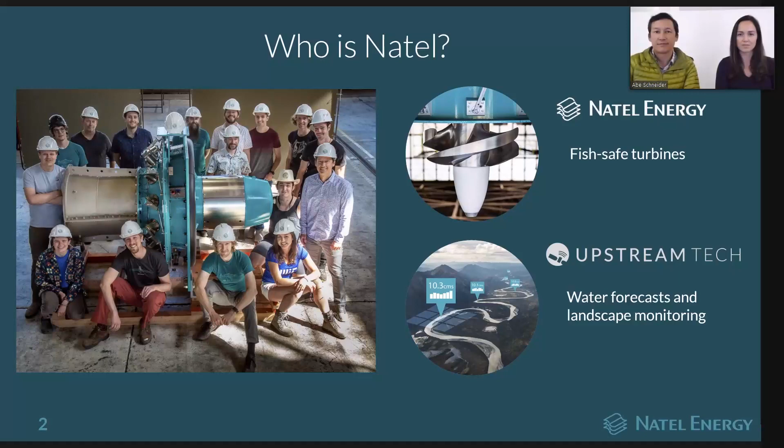One of the forks ran through an area of the watershed that was managed for multiple uses, including cattle grazing. Some of the ranchers would take out the beaver dams in that fork, thinking that the beaver dams flooded the meadows, but actually the beaver dams were essential in the creation of those meadows.

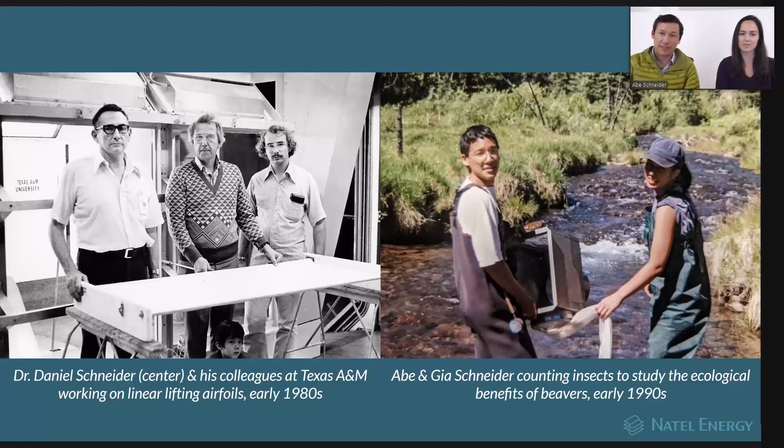Turns out there was a significant difference, an increase in the number of beneficial macroinvertebrates in the stream that had healthy beaver activity. So this motivates our work today.

It's because of the effects that their small and porous dams have on the surrounding riparian zone, increasing the quantity of water in the soil and keeping all those plants healthy and green. So beavers are one inspiration for showing us how we can do infrastructure better. And that's really important when we look at some of the issues with migratory species and hydropower.

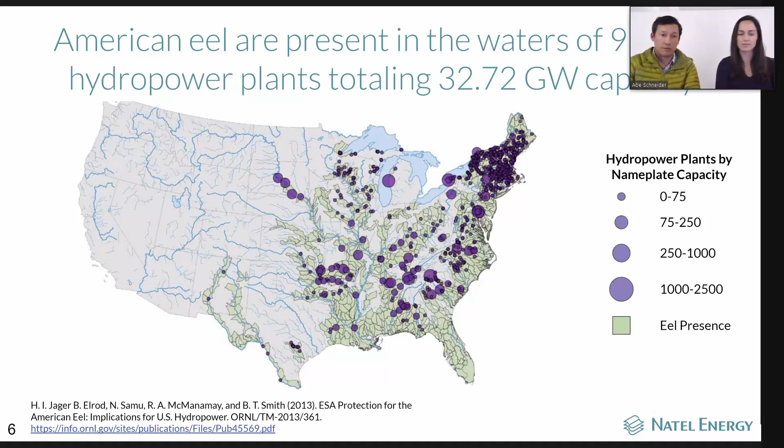To go out to the Sargasso Sea to complete their life cycle. That's an inherent issue, because they need to pass through potentially numerous hydropower facilities on their way to the ocean.

A lot of intense focus is now being placed on the effect that hydropower facilities have on the ecosystem, including fish passage. There are hundreds of hydropower facilities undergoing relicensing in the next decade, and 70% of those projects are on eel territory. Many of those projects are relatively small, leading to a pretty severe issue with eel passage.

The other important aspect about the US fleet, and this is also true of the Canadian and European hydropower fleets, is that the average age of these facilities is quite old—over 50 years. Many of these facilities already need to invest in refurbishing and modernizing their turbines simply to keep them operating. This presents a real opportunity to make a wise decision to both modernize and relicense these plants with an eye towards improving safe fish passage.

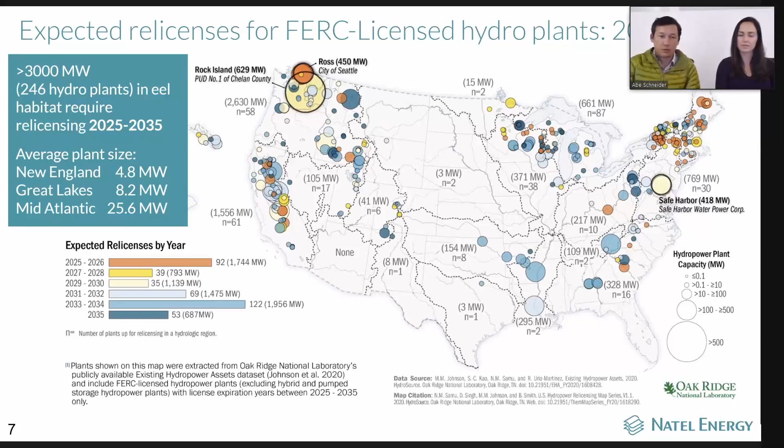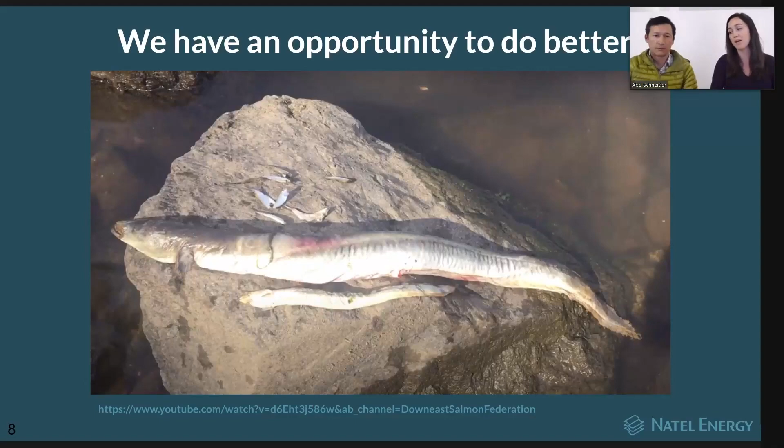Just like Abe was saying, at this point in time we actually have a major opportunity to improve the way fish pass downstream through hydropower plants. Out in California, we have some different migratory species than what is over on the East Coast, but we are still very familiar with the St. Lawrence River and specifically how important a watershed that is for the American eel.

This is the current situation when hydropower turbines are not safe for fish. When the turbines are not safe, really the only options are to either screen the turbines and give fish alternative pathways around the plant, or to require turbine shutdowns, particularly during migration periods. In some cases this can work, but it's a very difficult solution because it's a trade-off of what flows can be used for hydropower generation versus fish passage.

When you have a situation like this, a situation of fish exclusion, the fish need to find a very likely small fraction of the flow to be able to complete their downstream migration. Besides that, you have risks of fish still managing to pass through screens or get injured on screens and incur mortality through that infrastructure as well. This needs to be done on potentially numerous power plants in series, all the way from the headwater down to the ocean.

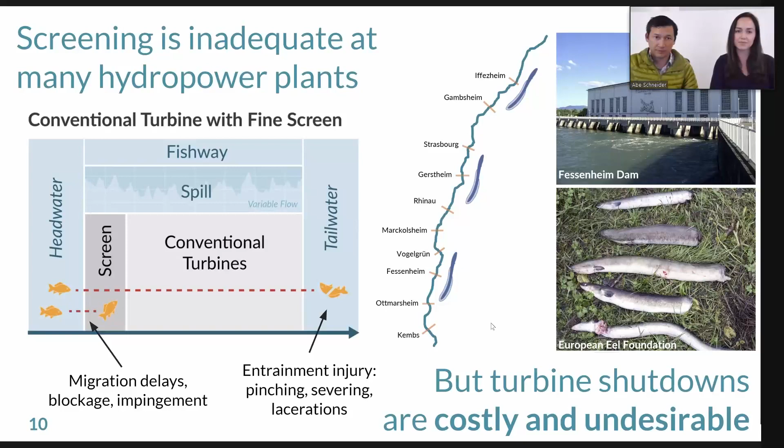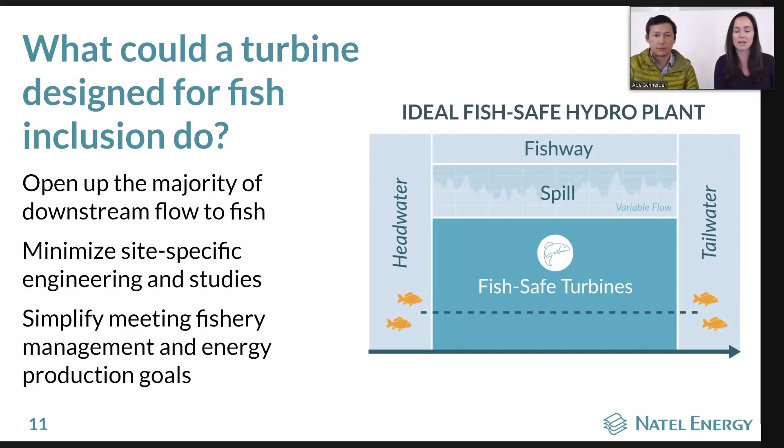So just to take a step back, we've mentioned this term fish-safe hydropower, and this is something we want to make sure is really well defined. Truly fish-safe from our perspective means having a negligible effect on fish populations in a watershed context, and that may vary for different species, life stages, and rivers. For example, if you have a river with 10 hydropower plants in series and fish need to pass from headwater to tailwater, a 99.5% survival rate per site gives you a 95% survival rate for the population. So true fish safety can be a very high bar.

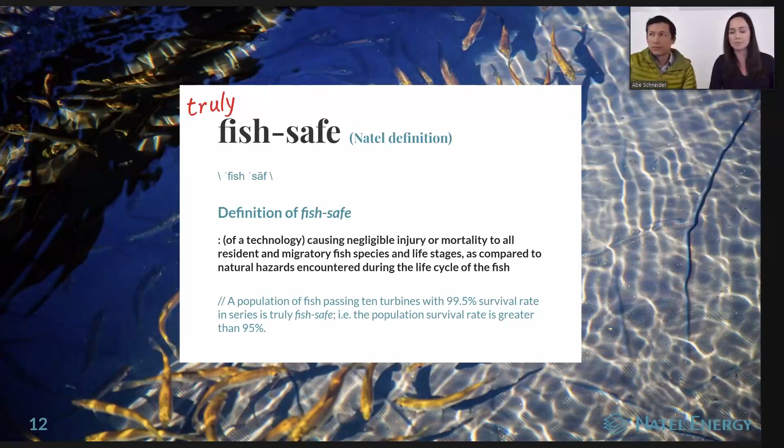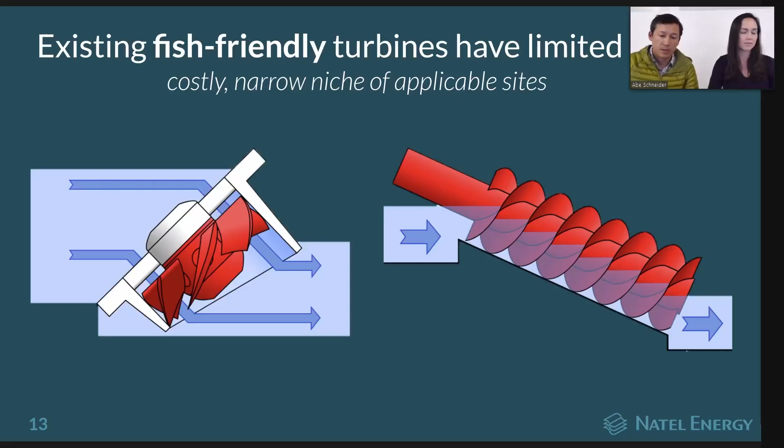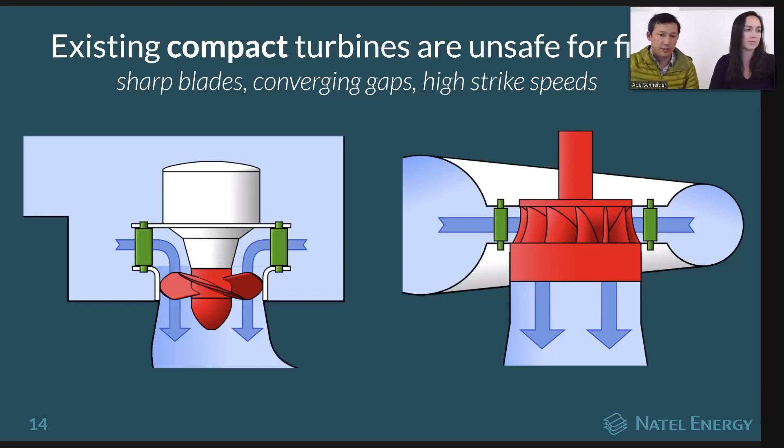So instead, what's needed is a way to rethink how turbines like these function in regards to fish safety. On the left is a propeller or Kaplan turbine, and on the right is a Francis turbine—the types of turbines that generate the majority of energy today from hydropower. The turbine on the left is found very commonly in Canada and the US at projects with less than 100 feet of head. In those turbines, the mechanism that kills fish is often mechanical rather than pressure related, because the blades are thin, move very fast, and in some cases have converging points where a fish can get stuck and pinched between a moving part and a stationary part.

So the question is, is it possible to improve strike survival by design? And the bottom line is yes. We're building on work that was done about 10 years ago by Alden Research Lab.

In this slide are a set of photographs taken from 1,000 frame per second high-speed videos of fish being struck by both thin blades and thick blades. What Alden discovered is that there's a very key ratio—the ratio of the length of the fish body to the thickness of the blade striking it. If that ratio is small, or close to 1, the fish can survive significantly higher strike speeds than if the blade is much thinner than the fish. As Natel started to think about turbine design for fish safety, we really looked at these stills.

It's really interesting to see some of the fluid mechanics going on. In the upper set of images, the fish is struck by the approaching blade, but its body shows no indication of the blade approaching until it's actually physically contacted. The fish is then sharply bent around the blade and is very likely to die from spinal fracture. But when a fish is struck by a thick blade, its shape actually conforms to the geometry of the incoming blade even though there's no contact at all. This shows that work is being done on the fish body by the fluid being pushed by the blade towards the fish. So there's no sudden change in curvature, and the fish is able to slide off and live. This results in a 50% increase in the safe strike speed of the blade.

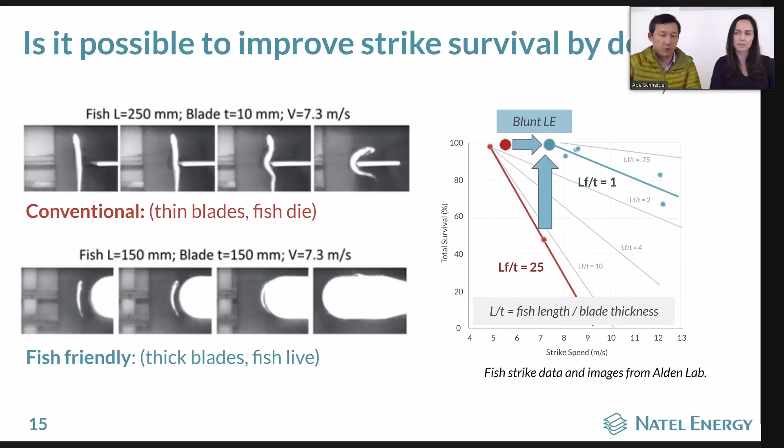But this isn't in itself sufficient to design a turbine that's as competitive as conventional turbines in terms of energy density. We'll get into that in a second.

As our goal was to figure out how to design a turbine that could operate at higher speeds while still being safe for fish, we conducted a series of fundamental strike studies at Alden Laboratory using their linear strike facility. What you're looking at here, this big long blue tank, is a rectangular flume with a set of rails that allows you to propel different representative turbine blade geometries across the flume, and different sizes of fish can be placed within the viewing chamber.

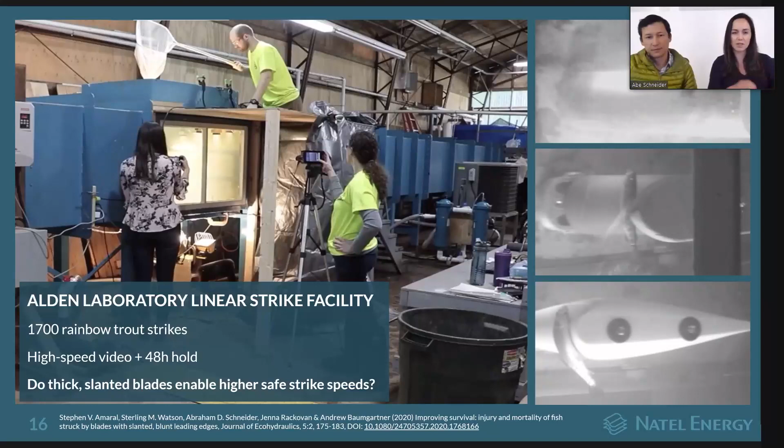So you can collect high-speed video of the strike event, as well as detailed injury and mortality observations afterwards. We conducted a study here in 2019, and the results were published in 2020. We looked at how the size of the fish relative to the thickness of the blade, the L/T ratio, the strike velocity, and the geometry of the blade affected strike survival outcome. That's been a very important data set as we've continued to develop our turbine designs.

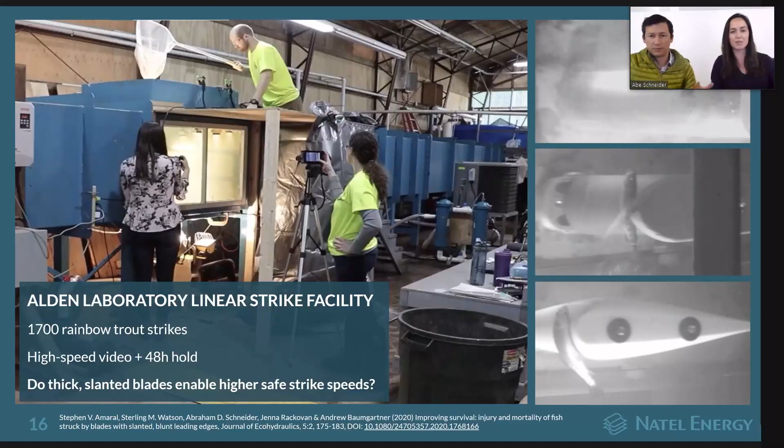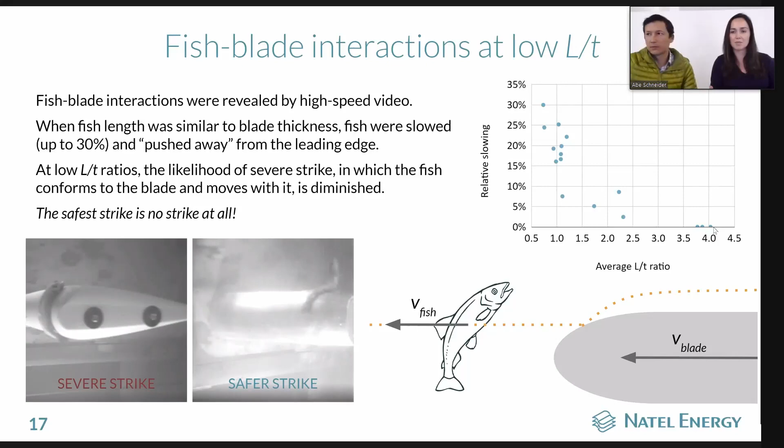One thing we learned from the analysis of the high-speed video from the strike study was a bit of quantification around why these very thick blades improve strike survival outcomes. As the L/T ratio gets smaller, or the blade gets larger relative to the size of the fish, that blade actually acts to push the fish out of the way. At L/T ratios around 1, the fish can be slowed by close to 30%, and so the actual contact, if it occurs, is at a lower velocity. That helps explain why these types of blades can really improve the strike survival outcomes.

I mentioned that making blades blunt isn't enough to allow for a turbine to be as power dense or energy dense as a conventional non-fish-safe turbine is. In order to do that, we needed to allow for a significant further increase in rotating speed of the turbine, which could create problems because then the tip speeds get really fast.

Our approach to allow for a turbine to rotate at maximum possible velocity while still respecting the biological limits of fish is to add a slant to the leading edge, which gives the turbine a very unique shape. In these images on the right, you can see the leading edge of the blade is swept forward out towards the tip. Out at the tip, where the tangential velocities are highest, this slant allows for a reduction in the normal component of the strike velocity that the fish feel. This allows for effectively achieving a uniform strike force all along the leading edge of the blade.

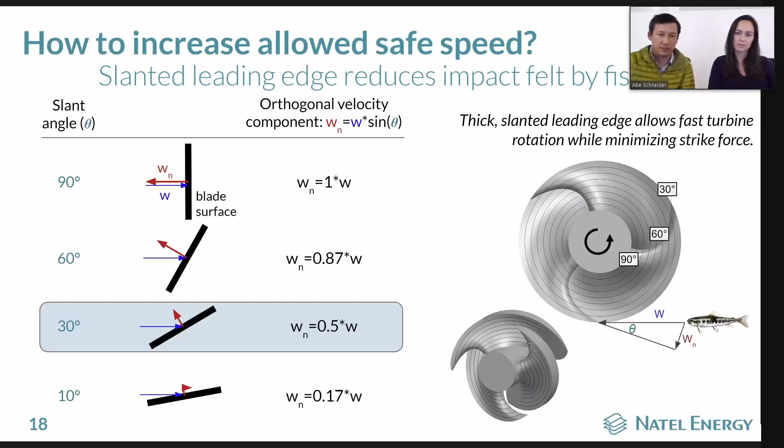That's the hypothesis we tested in the linear strike rigs at Alden Research Laboratory. This gives you a sense of how a turbine designed with these principles might appear in comparison to a conventionally designed simple propeller blade. As you can see, the blade on the left has very thick blades that are noticeably swept forward. There are fewer blades, so there's less blades to contact than a conventionally designed propeller blade on the right.

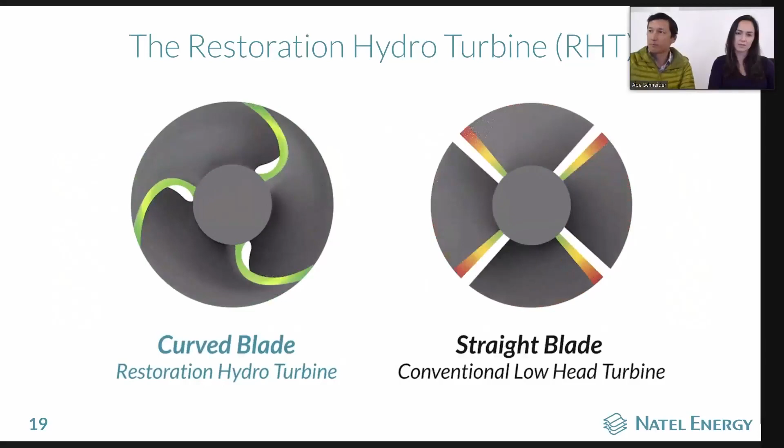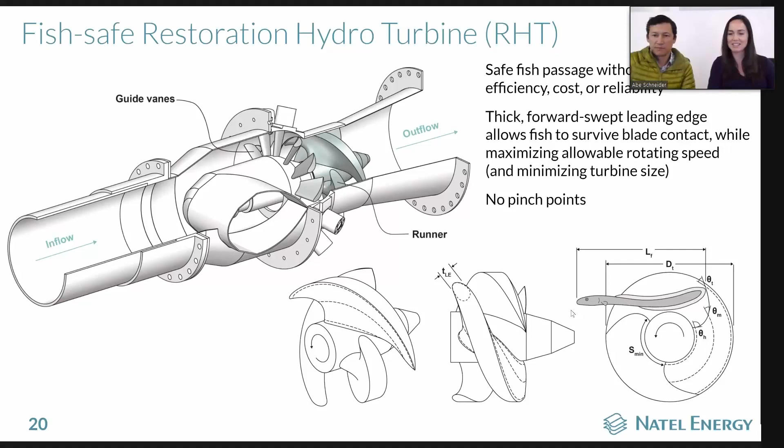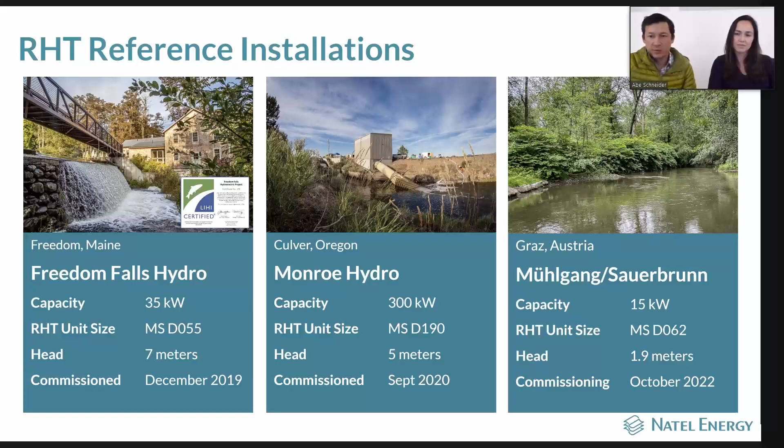At this time, we have three projects operating with RHT style turbines. One is in Maine, at an old mill that's been repowered with a fish-safe turbine. Another is a project in Oregon. And excitingly, the most recent project is in Austria, our first European project. That project uses a submersible turbine. We'll take a closer look at a couple of these projects.

This slide shows some photographs of the Oregon project. This is the largest turbine we've built to date, but not the largest we're in the process of designing. This is a 1.9 meter diameter runner, operating at a 5 meter head, producing 300 kilowatts. It uses a direct drive machine, very efficient, very simple in its operation.

This site has had two different fish passage tests, which we'll go into in more detail, achieving safe passage of a wide range of rainbow trout. In this video, you can see one of those trout passing through the moving turbine with yellow balloon tags, used for its recovery. Natel is also in the process of building four additional units of this size at their full rated head. At 10 meters, these units produce 1.25 megawatts apiece.

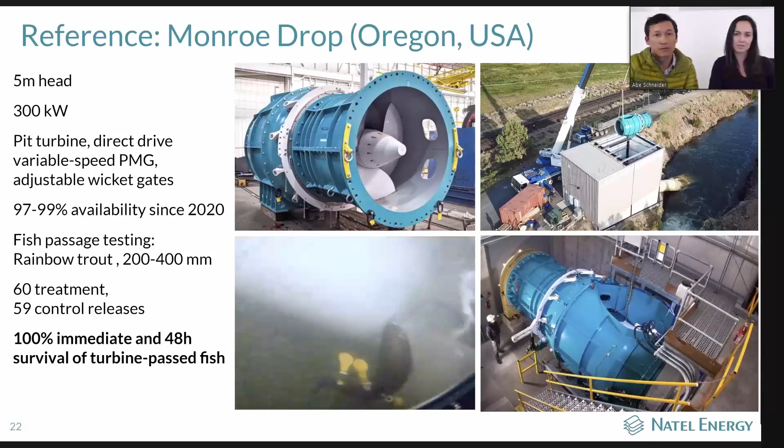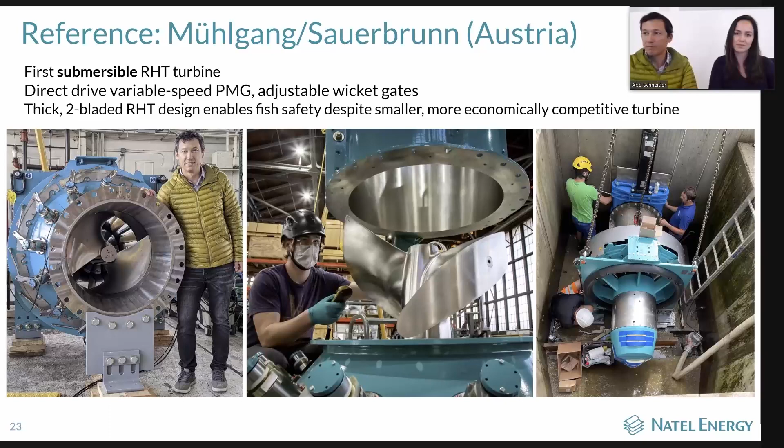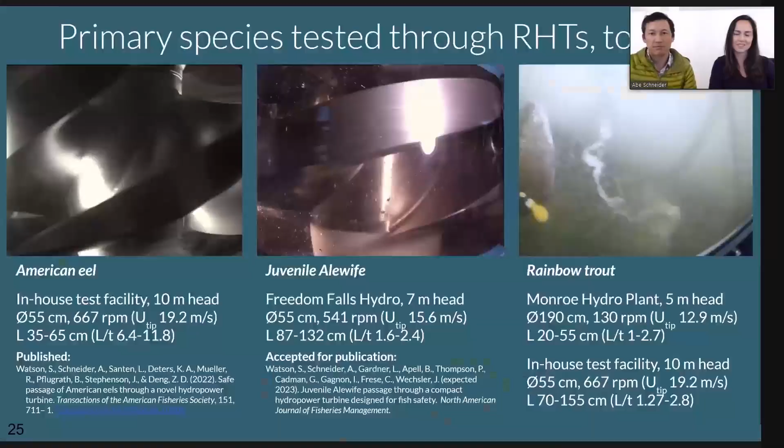Next we'll share more about our fish passage testing, both at small and large scale in lab and field environments. This is a quick snapshot of fish passing through some of the turbines that we've tested. We've tested several different species, but are in the process of getting publications out to describe that work. I'll be talking more about the tests we've done with American eel and also with juvenile alewife.

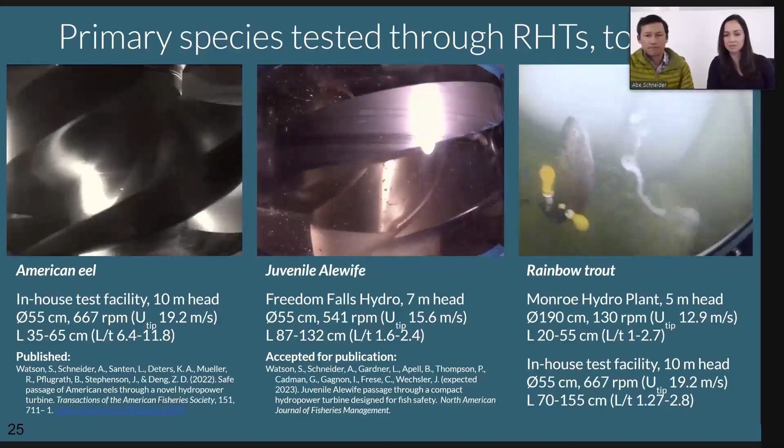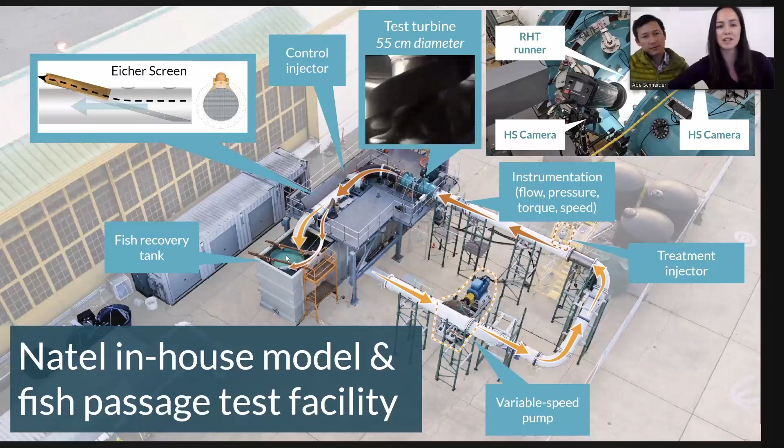So just to walk through what's going on here, this is a constant recirculating loop. Fish are injected into this pressurized canister upstream of the turbine, where they then pass with the flow into the turbine itself, which is equipped with a transparent runner housing and high-speed video cameras. From there, the fish move downstream and are separated from the flow by an inclined wedge wire Eicher screen, ending up in this recovery tank where we can take a look at their condition.

Our largest and most comprehensive fish study to date was with American eel, conducted in fall of 2021. The goal of the study was to go beyond just understanding whether these eels would live or die under relatively extreme conditions of our turbine design. We really wanted to get a good look at how they pass through the turbines and how their condition and behavior change over time, both immediately after passage and after an extended hold period.

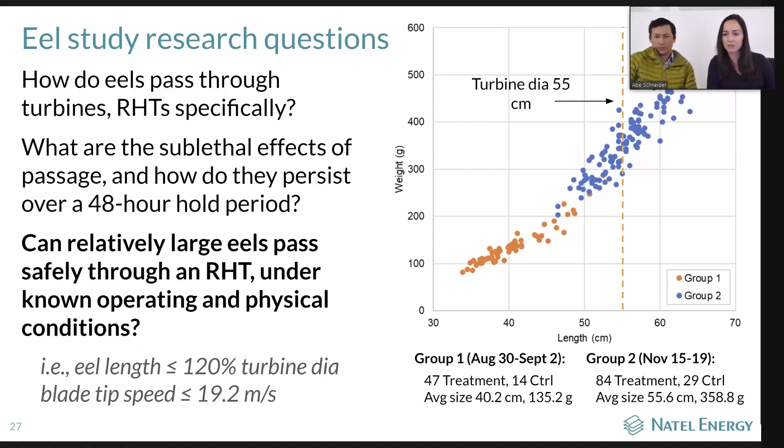But I'll walk through how this study was conducted. This slide shows what we mean by the relatively large size of these eels. The size of the eels we tested on the model scale, if passed through a 1.9 meter diameter turbine like the one at our Oregon site, would actually correspond to eels larger than what you might even see in the wild, even in a place like the St. Lawrence.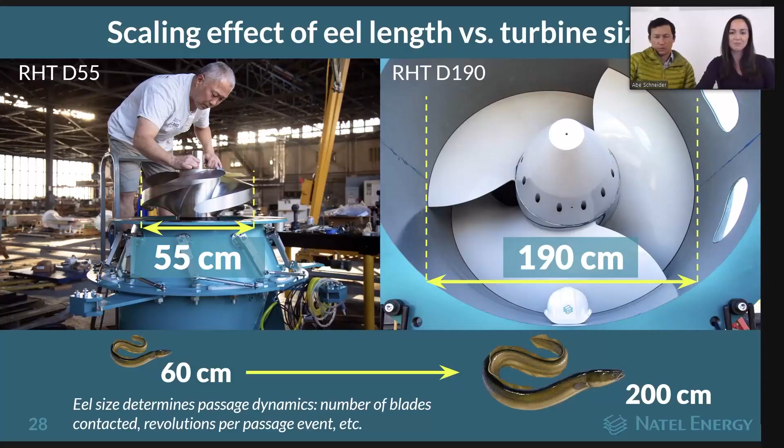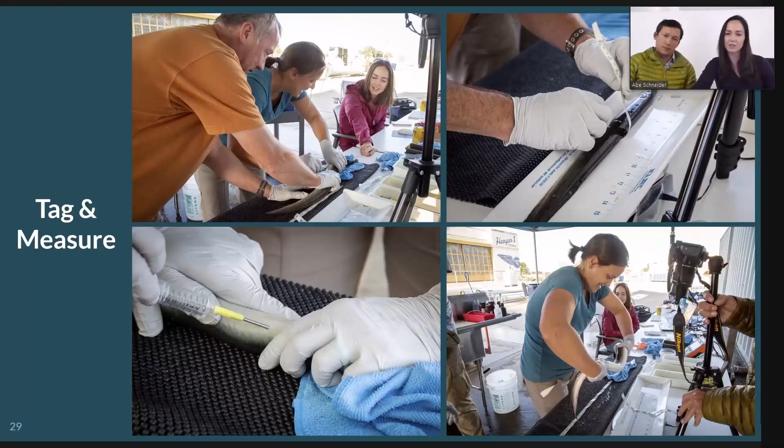For the study, we worked with a team of biologists from Pacific Northwest National Laboratory. Each eel was measured for length, weight, and girth, and tagged with a PIT tag for individual identification over the course of the study. The eels were observed both for their swimming behavior with video, as well as placed in transparent tubes to allow us to get photographs and note observations of their condition around the entire body. This was done immediately before the eels passed through the turbine, immediately after they were recaptured, and after a 48-hour extended hold period.

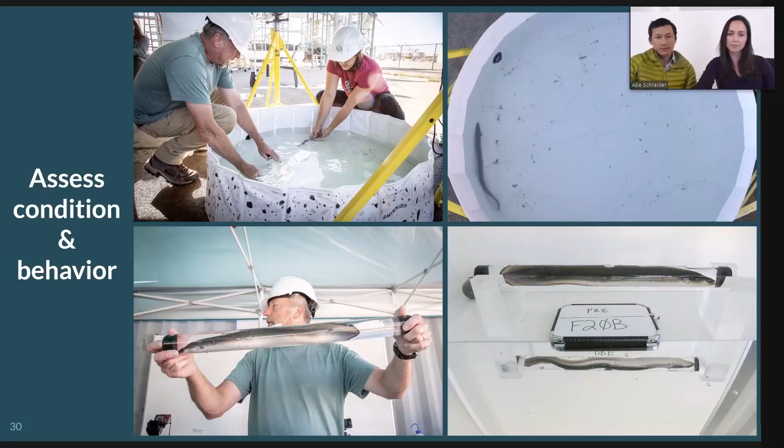After their initial inspection, the eels were carried over to the injection station on the hydraulic test loop. What you see in the bottom left image is an eel that has been loaded into the canister and pressurized. When the red ball valve is opened, that eel gets pulled down into the pipeline, passes through the turbine, and then pops out at the recovery tub. That entire process takes approximately 8 seconds.

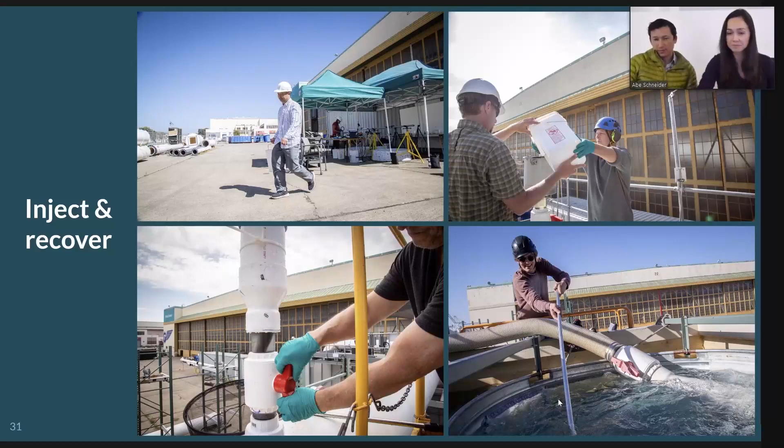At the same time, we had a team of high-speed video operators who were scrubbing through footage to capture the moment that the eel passed through the turbine. With a good deal of practice, we were able to have a pretty good success rate of 80% of all eels that pass through the turbine being captured on video.

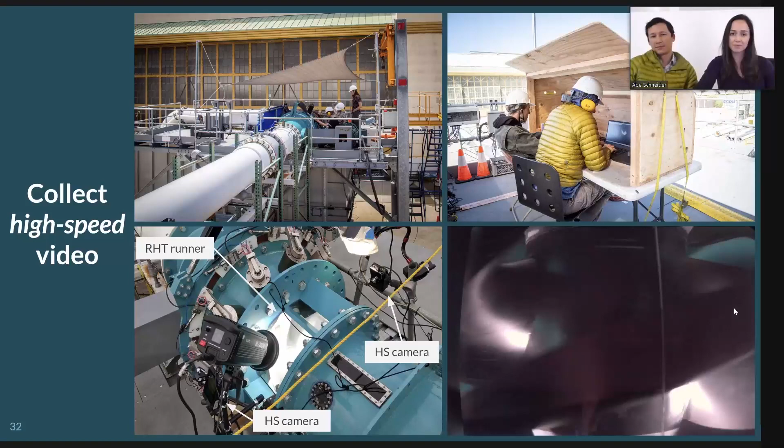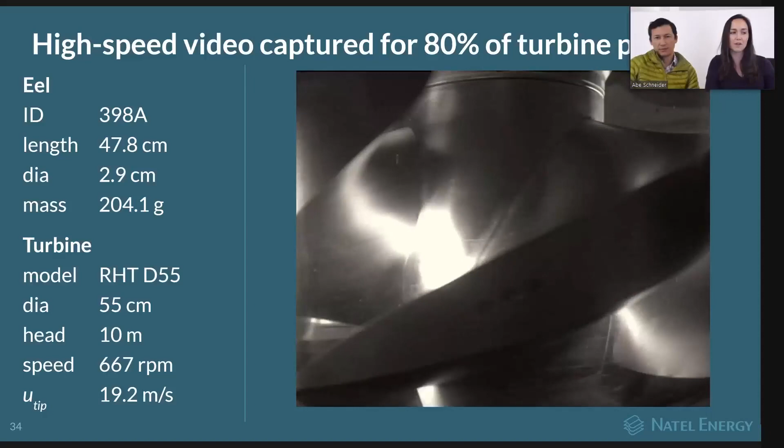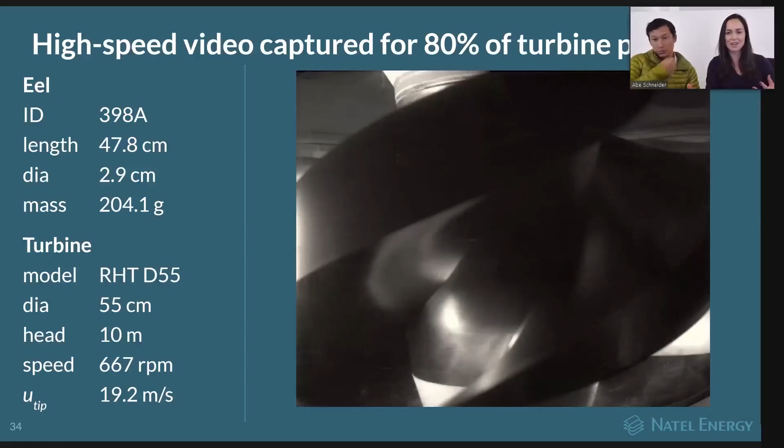This is an example of an individual eel from the study, showing the observations we were able to make of its condition at the 3 observation stages: pre-test, post-test, and the 48-hour hold period. That same eel is pictured here passing through the turbine. The work that we were able to publish helps to draw observations about how the passage event affects the condition of the fish.

So that's available for you guys to check out. It was just published last year in Transactions of the American Fisheries Society.

I think this body of work is breaking new ground in revealing dynamics of eel passage through turbines, and this information is applicable not only to our types of turbines, but potentially to others as well. I want to highlight an example of this. I've heard personally theories about eels passing through turbines that they can somehow tell they're going to go through a turbine, and they ball up into a, they turn themselves into a ball, and then they go through the turbine and swim on downstream.

Instead, they were either swimming upstream or downstream, and we were able to determine some trends in terms of the size of the eel and whether they were swimming upstream or downstream. There are some theories about swimming strength you could make, but we're learning a lot, and I think other researchers might learn a lot from the data set as well. One of our goals with publishing this is to show some of the things that could be observed, and hopefully inspire additional work to look more closely into some of the phenomena we've shed light on.

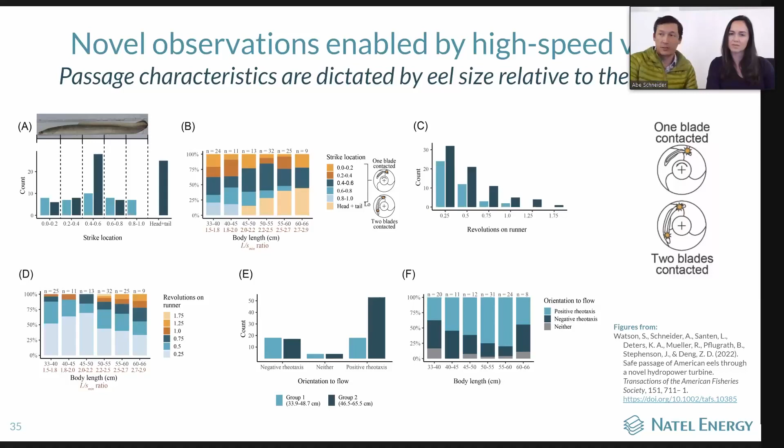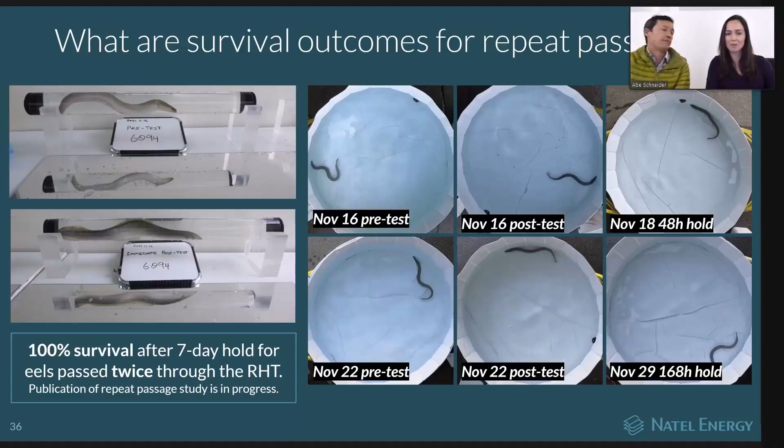At the conclusion of the study, we actually had a large subset of the original group of eels remaining in our tanks. There was a fraction that we culled for X-ray observation, but these eels, because they were already pit-tagged, we took the opportunity to look into another important question: how do these eels fare passing through the turbine again? This is relevant because many eels have to pass through multiple hydropower sites on their way to the ocean.

We were able to repeat the exact same test 7 days after the original study, and again we saw 100% survival of all the eels.

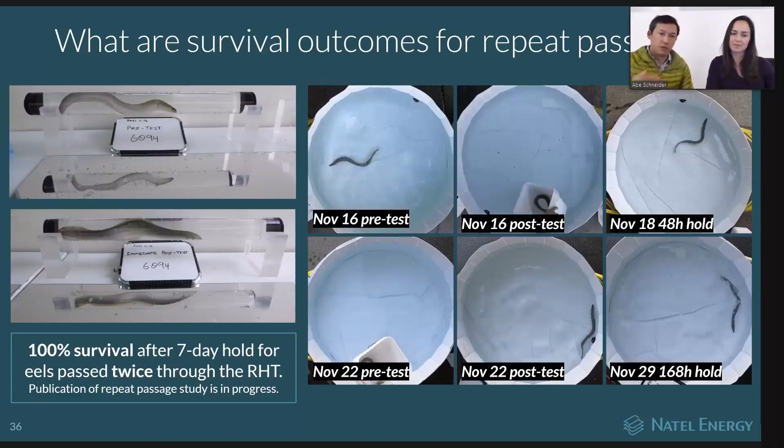This is work that we are working on publishing. This is one of the most exciting outcomes of our eel testing work to date, because it really underscores the possibility of allowing eels to pass through potentially numerous hydropower facilities and keep on going.

In the fall of 2021, we did another big study, this one at a field site looking at the passage of juvenile alewives, or gaspereau, through a small turbine unit, also 55 centimeters in diameter. The reason we conducted the study at this location is because it's located next to a very large natural alewife run, so we conducted the study right in the middle of that migration period. We wanted to study alewives because they're a good representative anadromous species, and we know they are exceptionally fragile and susceptible to injury and mortality just through their natural migration process.

This study is in the process of being published. It was accepted for publication, and the results were really encouraging.

We saw 100%, plus or minus 6.5% survival, corrected for the controls.

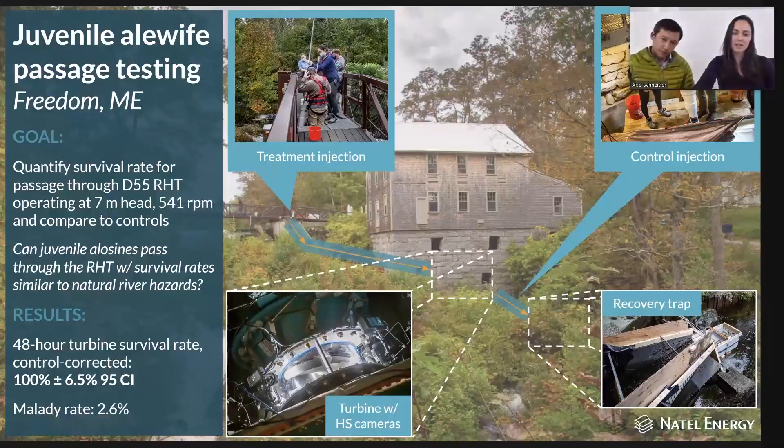For this study, we were actually able to install a transparent half runner housing in the field, which was really valuable because we wanted to see if those same effects of the low L to T ratio and the slant angle would essentially move fish out of the way of the leading edge of the blade.

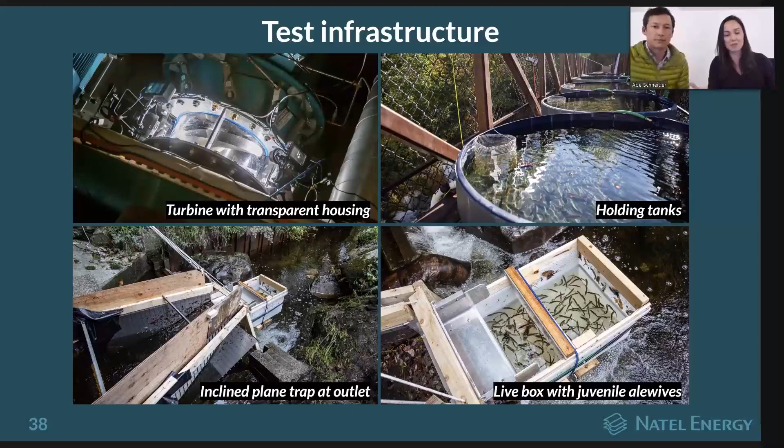Another special feature of this study was that we had a 100% recapture trap at the outlet. Because these fish are so delicate, we didn't want to use any sort of tagging or marking techniques, so we were able to capture 100% of the fish that passed through the turbine at the outlet.

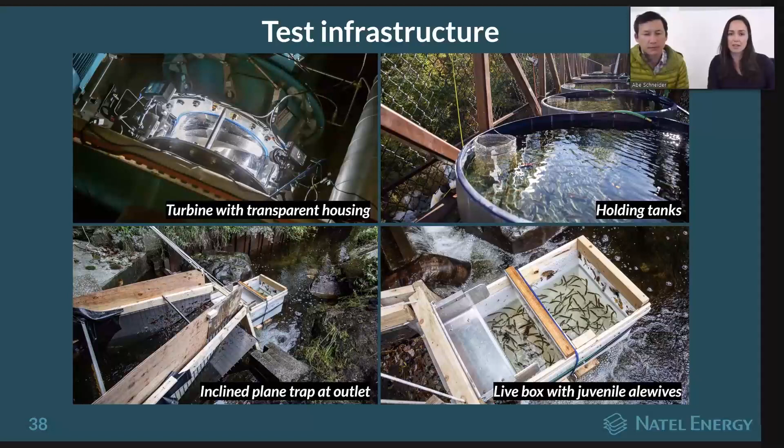The test procedure involved capturing the fish at a nearby drop location and then holding them overnight and then passing them through the turbine in large groups, groups of about 60 fish.

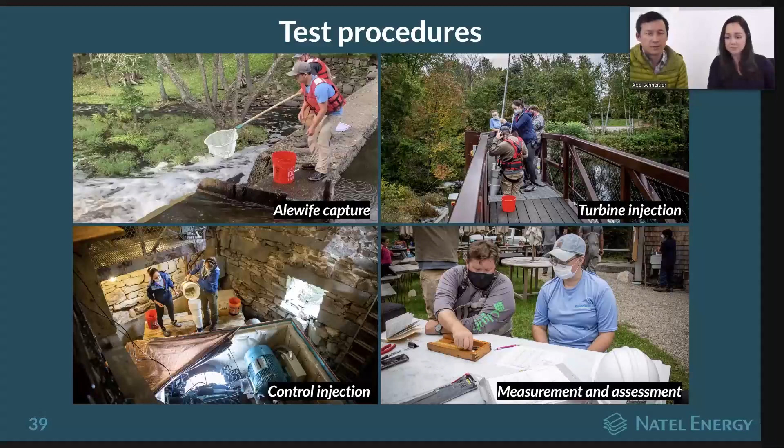A little bonus result of this test was that because we had 100% recapture at the outlet, we actually captured other fish that were just naturally present in the mill pond. This was really exciting for us. We captured a bunch of crayfish and many suckers over the course of the study.

Sunfish, one 40-centimeter long eel passed through, and all of these fish are actually passing through a 19-millimeter screen that is installed at the intake of the turbine. So these are fish that are passing through this site all the time. Also a 20-centimeter long black bass, and fortunately, we were able to see that all these fish are passing through unharmed.

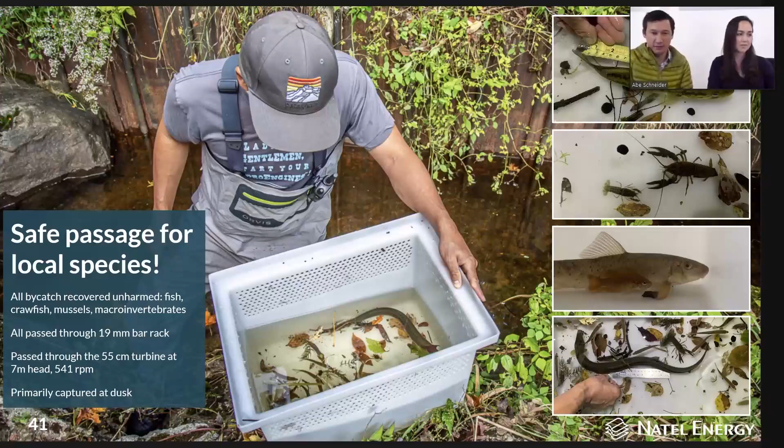This is really the vision, is to just allow the ecosystem to function. These fish chose to go downstream. They can do so safely. This is the vision for hydropower into the future.

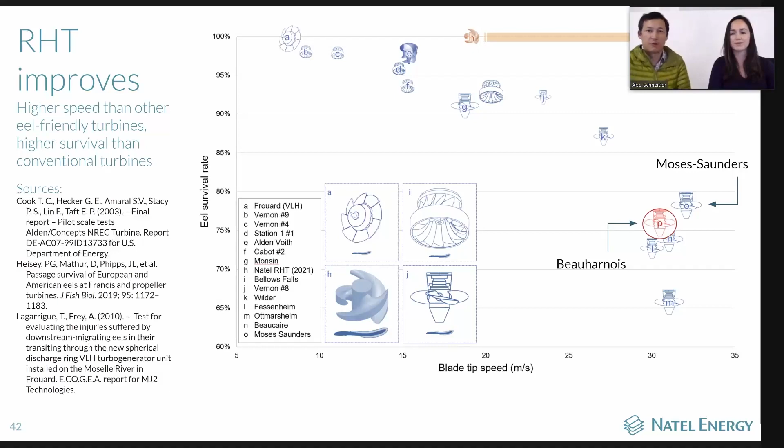projects that might be in your backyard, Beauharnois and Moses Saunders, are illustrated here. Those plants have propeller turbines, fixed pitch propeller turbines, rotating with tip speeds near 30 meters per second. And those would be great candidates for designs of the type that we're developing.

So in conclusion, where are we heading with all this work? The projects that have been built so far with turbines of the Restoration Hydro type have been small, but we're not thinking small. We're already working on turbine designs with runners past 4 meters and with power between 20 and 30 megawatts for an individual turbine.

And doing all of this with good efficiency across a wide range of operating conditions, which is really essential for project owners. We think we're at a pivotal moment in time where we've been able to demonstrate the concept. We've gathered a lot of good data for different species, different life stages, different sizes, under relatively extreme operating conditions. We're excited to move into the future and hopefully help improve the health of watersheds while also producing clean energy.

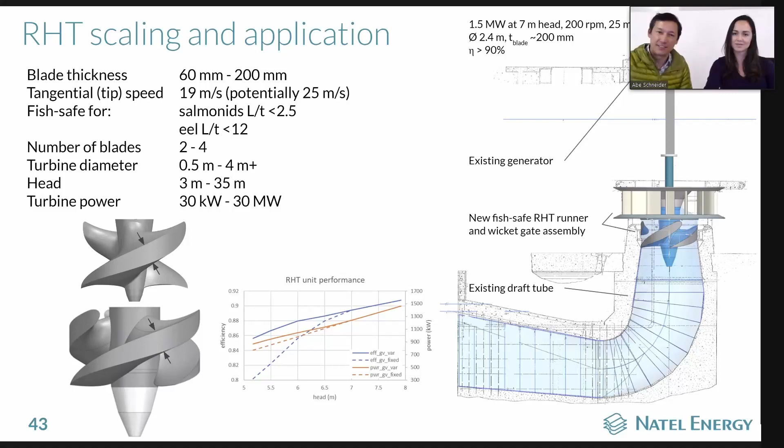Thank you so much, Abe and Sterling. It brings a lot of hope to have a positive story of how we can collect energy while minimizing our impact to the environment. I really appreciate the work that you're doing and the time you took to present for us today.